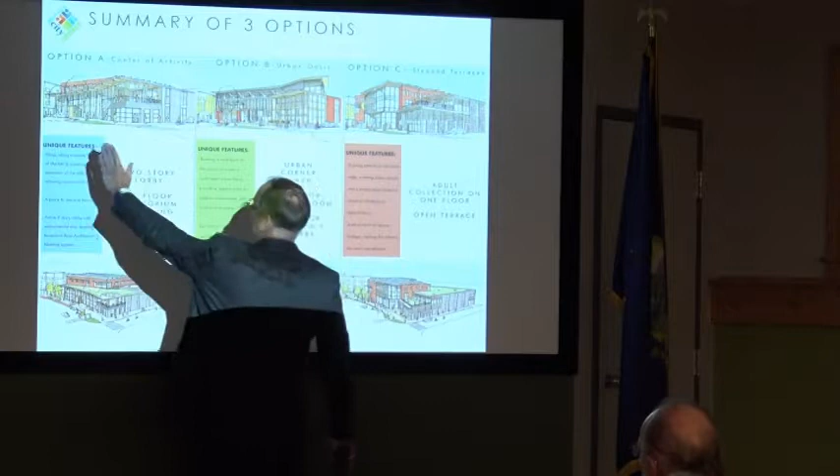But we also had a 2-story lobby that would visually lead you up to that 2nd floor auditorium. We also had meeting rooms up there, and it was a building that kind of followed the street, Market Street, so everybody realizes where the site is, right? Even you folks who did.

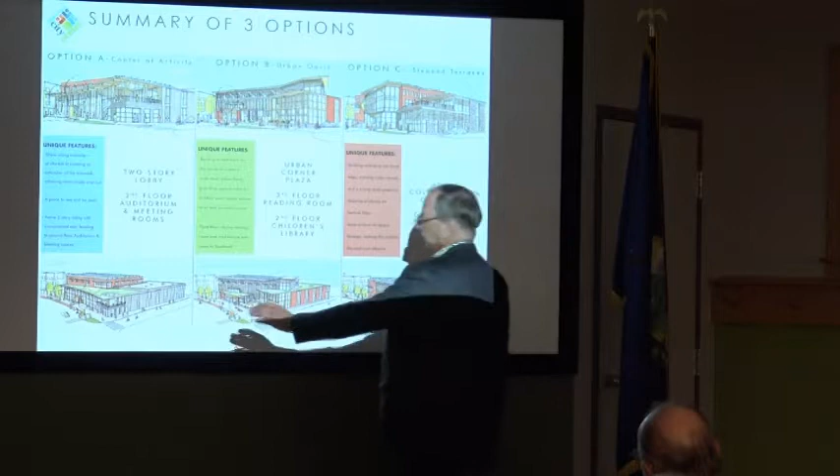Yeah, okay, all right. So Allard Square is the property right here. We're right to the east of it. The new street that we're creating is a relocation of the entry drive to the school. And so we had this outdoor space here in the corner on the 2nd level. And as you can see...

Sustainability is a very important component of our design efforts, so we're looking at solar panels and green roofs and outdoor terraces and things like that. So the Center of Activity, Option A, was a 2-story lobby and 2nd floor meeting rooms.

On Option B, we focused on a corner plaza, because being a civic building, we felt as though maybe there was a great opportunity to create a small space where people could come and get together as a town and celebrate, protest, have face painting, doing all those kinds of things you might do outside.

And then we also created a third floor reading room because we heard from a number of you that typically in a public building, the public doesn't get to go to the top floor. I shared that a library in San Diego, when I was here in January, had the 7th floor of a 7-story building be where the main reading room is, with all these wonderful views. So we thought, let's put the reading room on the very upper floor, best views, most daylight, all that. So that was a big concept there.

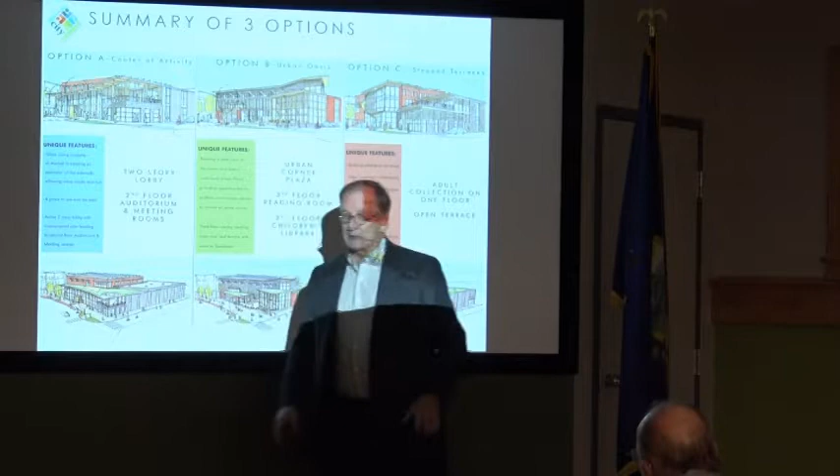Then we moved the children's library to the 2nd floor. I didn't mention it, but in the first scheme, the children's library was on the 1st floor, so you could walk into the library and the children's area was close by, so we're not taking strollers upstairs and things like that. Whereas in the second option, we decided we would try it on the 2nd floor.

Then the third option, we called the stepped terraces, was one where we had the adult fiction and nonfiction all on the same floor, whereas the other two options had the split. So the fiction was downstairs and nonfiction was upstairs. This also allowed us to put children's downstairs. And we had these open terraces that stepped back from the street.

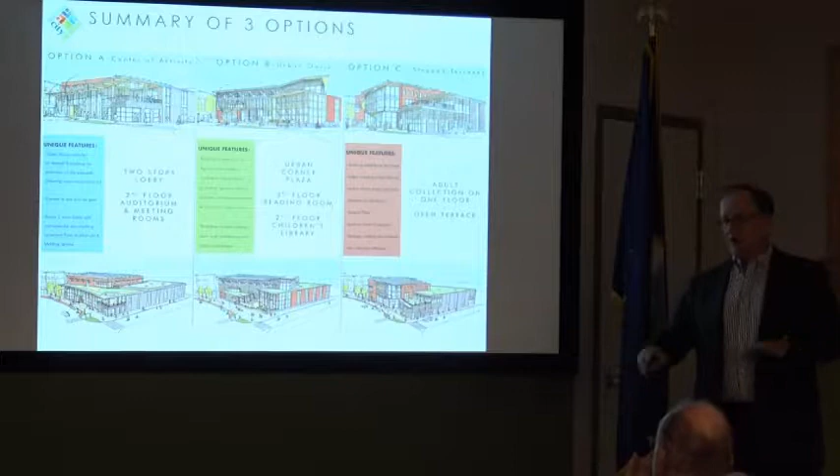I should also mention, we put the auditorium down on the 1st floor here, and we put the auditorium down on the 1st floor there. All of these buildings were 50,000 square feet, plus or minus, so there really wasn't one that was larger or smaller. We accommodated all the functions we've been talking about in all of them. It was just a matter of where we located them on the site and within the building, so we could take advantage of the views and how you came into the building and experienced it, etc. So those are the three options that we presented.

After the meeting, we asked everybody to go back in each one of the corners, and we had a board and an architect there, and we asked people to write down their comments. So the infamous Post-it notes that you all have, we're still seeking information because we've still got a long journey to go before this building will be open, and we want to make sure we're getting everybody's input. Speaking of everybody's input, just in the past couple of days, we've gotten over 450 comments. That's huge, that is really filling our inbox. And we're getting a lot of great ideas happening here.

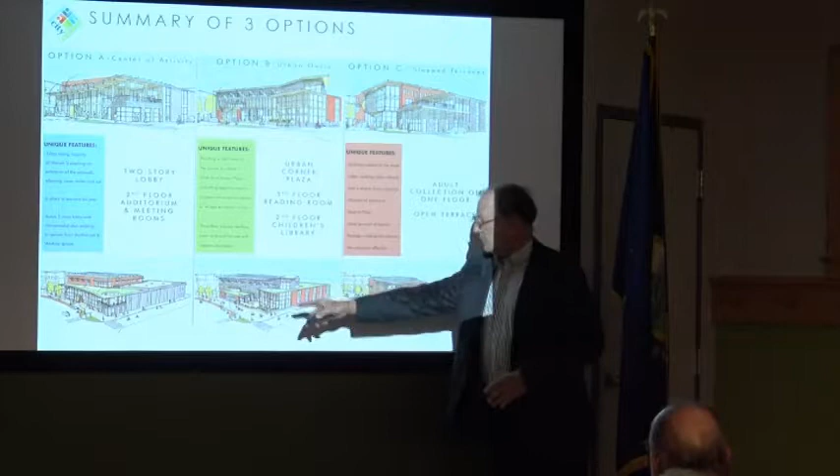So the exterior of option C was a bit boring on the outside. There was a sense that maybe there was more animation needed, more like the other two, but that was just one person. But we heard that from many comments, that option C wasn't necessarily the preferred exterior.

The second floor auditorium wasn't desired, except for those teens. But everybody felt that coming to the lobby of the building and going into the auditorium, which is a multi-purpose room, it'll have tiered seating for about 100. This is where council might meet, this is where meetings like this might occur. Well, everybody felt, most people felt, it should be on the ground floor.

The children's library on the second floor was not something people liked. The fiction and nonfiction split wasn't preferred by those who saw it. And then also the amount of exterior space - it says something about it's snowing outside, isn't it? But it was something to the effect that we're in Vermont, and we can only use an outdoor space like that so many months out of the year. So that's just the highlights of the comments we heard from folks.

Moving on, the exterior of option B was preferred. I think one of the things about the preference of option B is it had a roof on the very top where that reading room was, that some people called it a scoop, but it became very special. The plan of option C was the most efficient use of space, most bang for the buck. And when we talk about the most bang for the buck, we're not just talking about opening day, we're talking about the longevity, the operating of the building. So we're looking at it from a library operating standpoint.

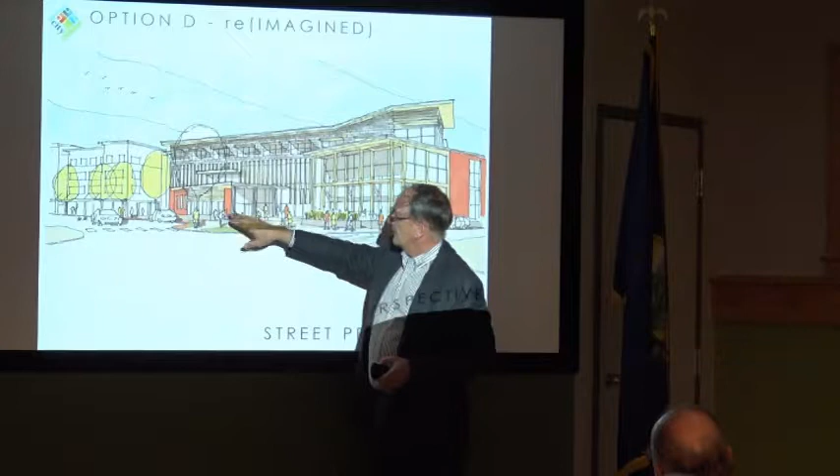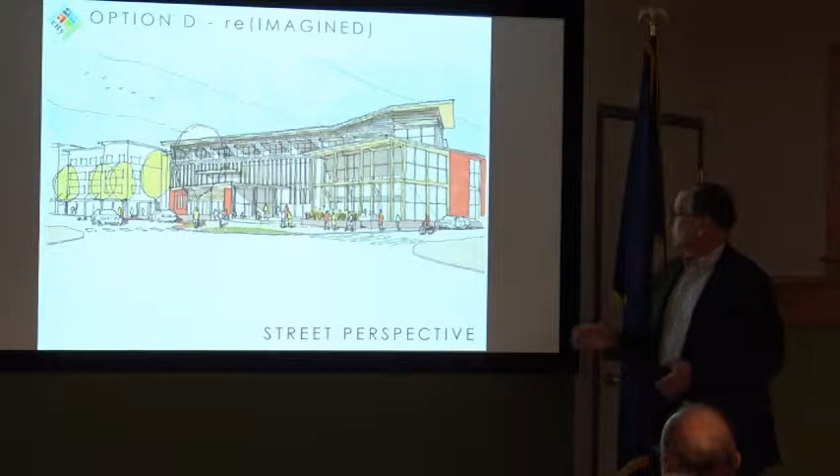We have some special places happening up on this level. We have a meeting room that's going to occur in this area here. And we have a wall that starts to kind of define the street, the curvature of Market Street. We have a very animated pedestrian experience, which is what we want to create along Market Street, because it wants to be a very downtown, urban, pedestrian street. And then this is the street going back to the school, and we have lots of glass. We aren't showing the street trees and things like that here, but just to give you an idea of the architecture - we have a two-story base, and then we have the celebrated third floor.

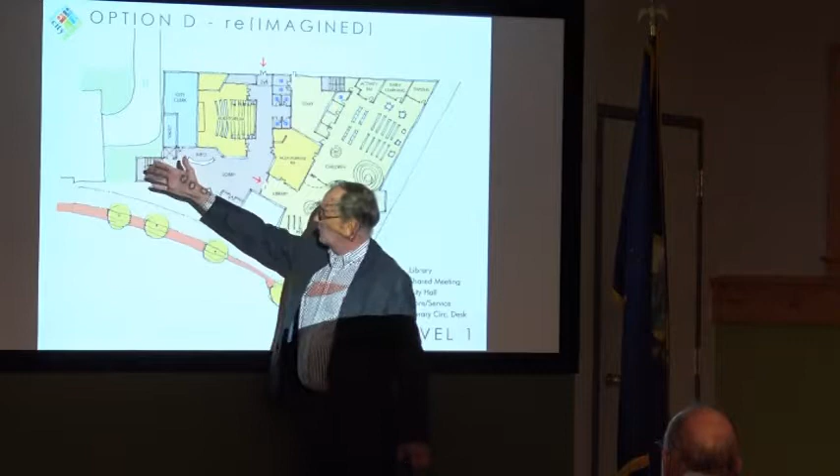So what we heard is that the lobby should be something to be celebrated, but not overly grand. So we only have a very small portion of it that might be two stories. But we come into the lobby, and we have the information desk that's right adjacent to the city clerk's office, so they're somewhat shared. That can be a one-stop shop. We have a stairway here that pokes out, so it can be all glass and open and very inviting.

We have down here an area that we can have seating, where people can have coffee, have their lunch, just sit there and celebrate along the street. So we have this lobby area that's appropriately scaled to allow for people to come into the information desk, or we can come this way to the library.

We also heard from a number of people that we have been providing an entry off the north from the parking lot to the school. And there's a sense that we had it maybe too narrow and it wasn't as inviting, that there may be folks coming in that direction. So we widened that up a bit and made it a bit more celebrated, but this is still the front door. We pushed the auditorium over slightly, but this is still the same auditorium configuration.

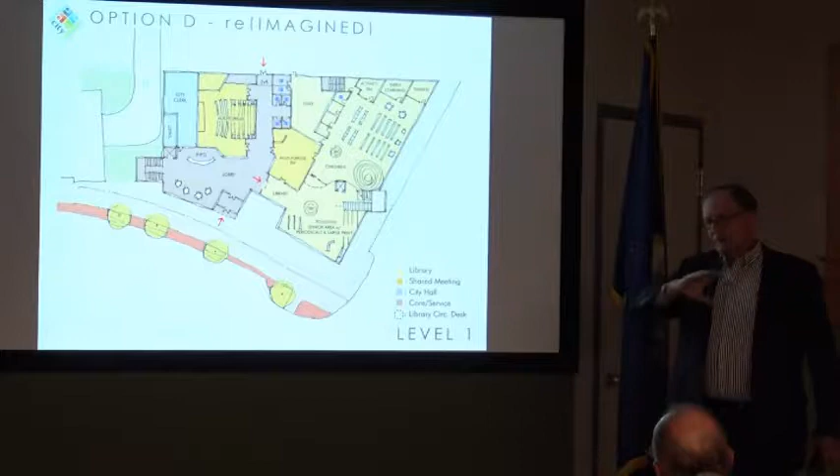We have storage rooms, and we have the ability that we can come in and unload musical instruments or equipment that's used in the presentation that can come from that side. We also have restrooms located back here that we're looking at having - I'll call them single stall restrooms that are private, as opposed to the traditional larger restrooms. And that's all off the hallway here, so that people going to this auditorium for events are a little bit separated from those taxpayers over there.

But we also have this multi-purpose room that can accommodate between 30 and 50 people. We've made it bigger - we heard that there was a need for making those spaces bigger, so we enlarged this room. We have a kitchen back here. And this room can be accessed off the lobby, or it can also be accessed from the library, so it can be used by both. Yes, sir?

Do you prefer to take questions on a slide like this while you go along, or wait till the very end? The question was, would you prefer to wait or ask questions now? I think what I'd like to do is go through this slide and then you ask questions, as opposed to just interrupting, if that's okay.

We created the multi-purpose room as kind of the hub of all these functions down here. The shared spaces are in the darker yellow, the city spaces are in the blue. The common public spaces, like the lobbies, hallways, and restrooms, are in this grayish color, and the library is the lighter yellow.

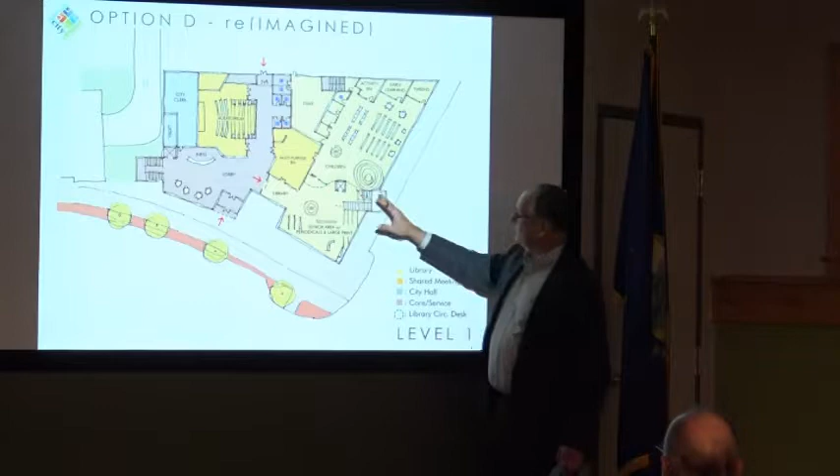Then we have a stair that goes up to the second floor, or an elevator. Going into the children's area, we have a defined children's area with a wall going like this. We're exploring a way to bring the bookmobile into the library so it's a feature used as you enter the children's library—it might be a part of it somewhere in here.

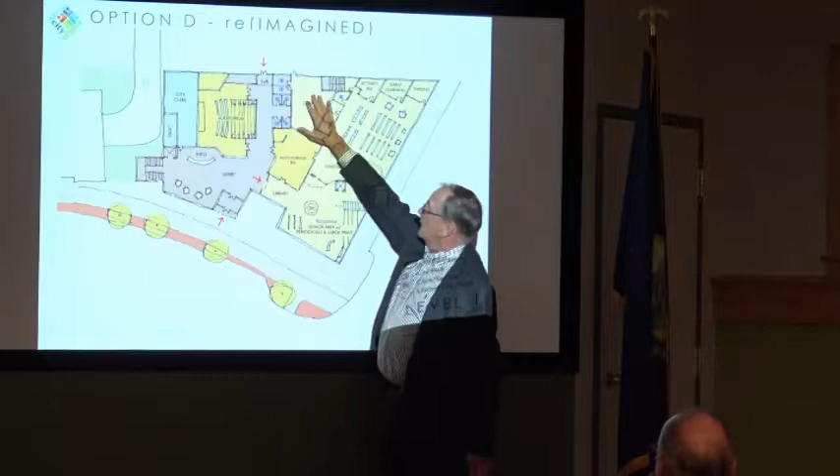We have the children's service desk here, in line of sight with the main service desk, so staff can come out and help if needed. Then we have the children's area with a tween room, activity rooms, and things like that back here. We have a children's family restroom, some offices, and staff processing books back in this area.

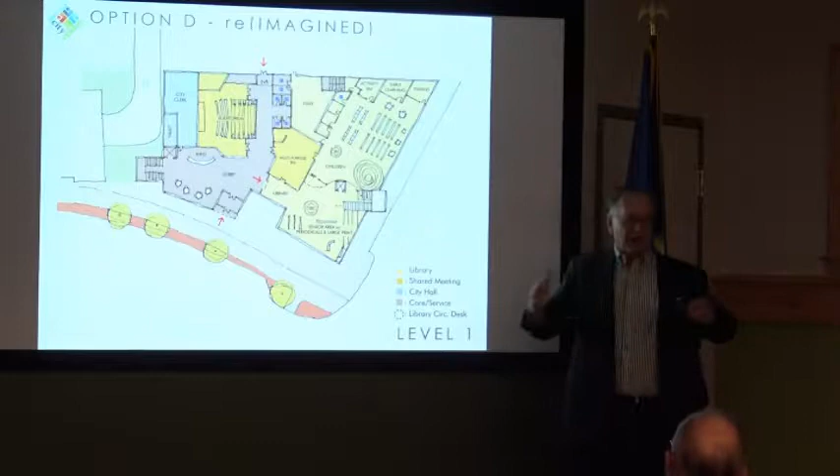And then we have the juvenile fiction and nonfiction, picture books, easy readers, and seating along the windows. We have a story time area right here—we're not going to have a room for that, but an area that may have a special ceiling, a special floor, etc., so children can easily come in. We can park strollers along here.

So the children's area works very nicely and is contained acoustically. It can also gain access to the multi-purpose room if there were a program that wanted to take place there. We've created this really special area as you enter. There's been some discussion about the Friends of the Library book sale kiosk taking place there, yes and no, so we're exploring how that might work.

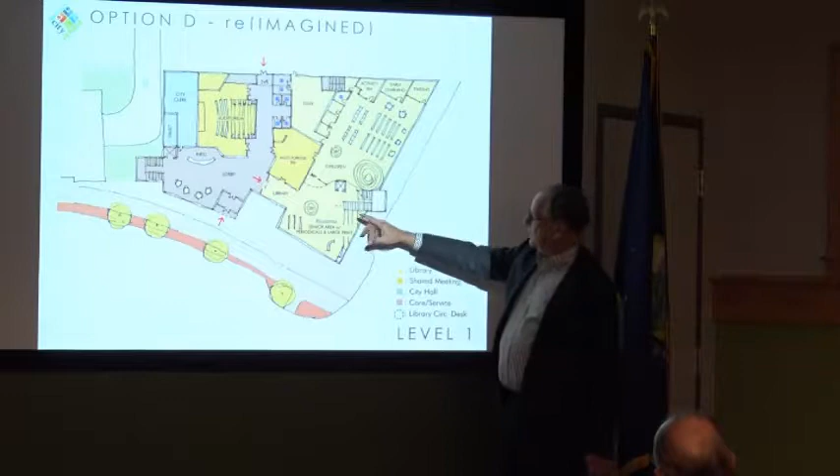But all of this area will be a really wonderful place to come in, very inviting, and then you would come up to the second floor. There's actually a space where we could have some seating on this landing between the two floors, and then the adult collection is upstairs. So I'll ask if there are any questions about what I just shared.

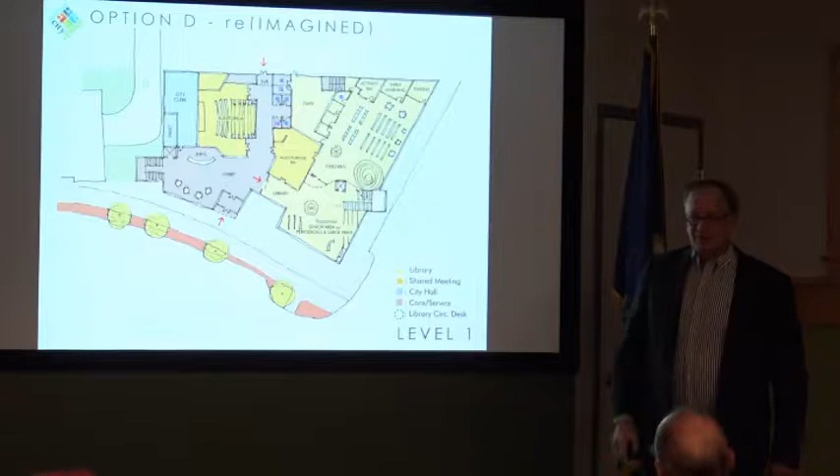Yes, sir. In an earlier version on the first floor, there was quite a bit of interest in a cafe kind of thing where people could eat food and either eat there or move outside during those months when you can. Has that disappeared? No, we still have the opportunity to have some of that happening here, and we're still wanting to look at having either a garage door or some kind of ability to come in and out, and to do something in here. So the question was, are we still looking at the cafe?

The second question was about whether the separation between the senior area and the children's area is sufficient, so that seniors who prefer less noise are balanced against parents who want access to the kids on the first floor. I think there is sufficient spacing between here and here.

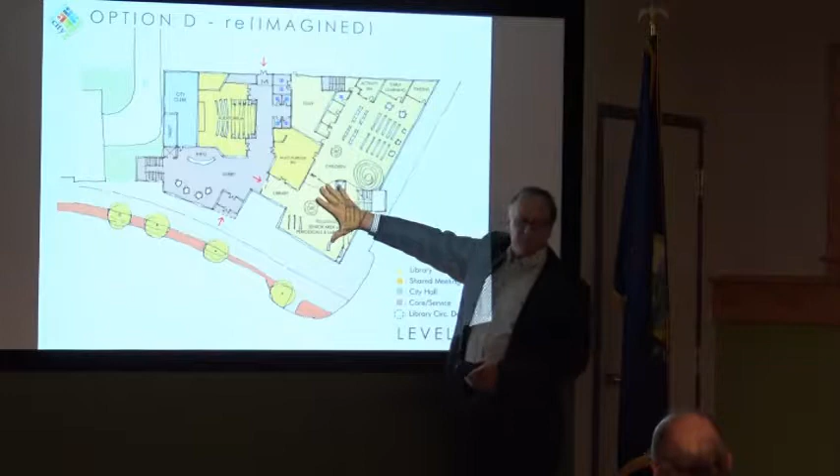It doesn't look like it, but this is a fairly large building. I'm going to guess, Tim or Michael, this is what, 50 feet or so? About 50, 55 feet, so it's like from here to that corner.

But there is a barrier for the sound, a barrier right here. So the question was about whether there's a separation from the children's area to the senior area. I'm going to ask this gentleman next.

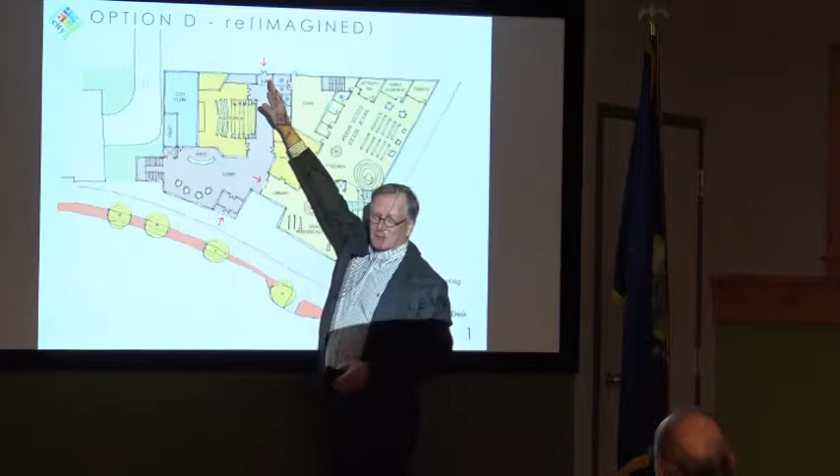I had three questions. The access at the rear of the building, will that enable kids from the school to come directly into the library? They wouldn't come directly into the library, but they could come into the building, and then access the library that way.

The second question was, how much smaller is the plaza than it was in the former option B? It's actually, there's a way to look at it where it's bigger, because we lowered the building to street level. In the original scheme we were up about 30 inches, so there was a separation between the streetscape and the actual hard plaza itself.

We've moved the ramp and lowered the building, so it's a continuous space from the curb and the tree belt right up to the front door. And the third question—go ahead.

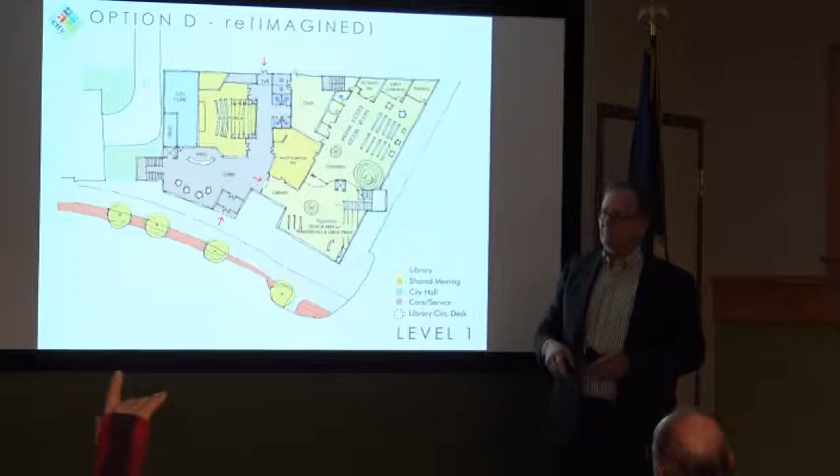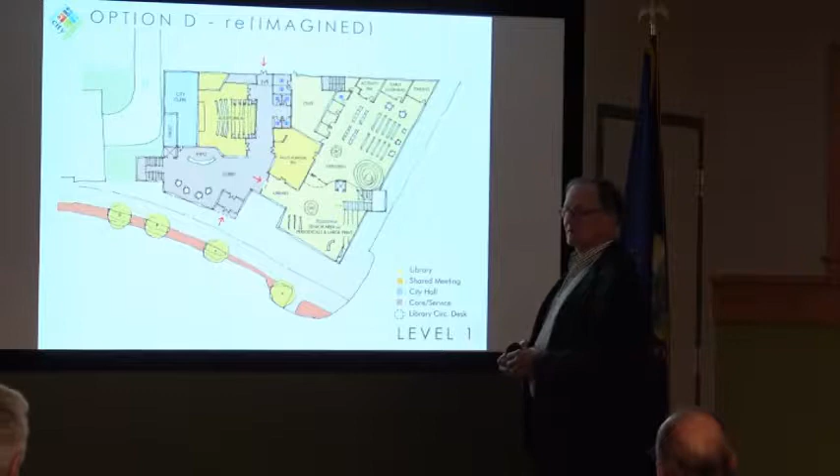Which is the most important one for me: is it possible to remove some of those sharp corners, two of them, which define the plaza? These corners here? That one, no, the one where your finger is, and then that one, yes.

Yes, we can do a lot of things. So the question was, can we soften those corners up? And yes, we're not quite into the architecture yet, so this is still a piece in evolution.

Did you want to say something? We are still exploring options for shifting the building a little bit in order to obtain additional plaza space. So we are looking at additional plaza.

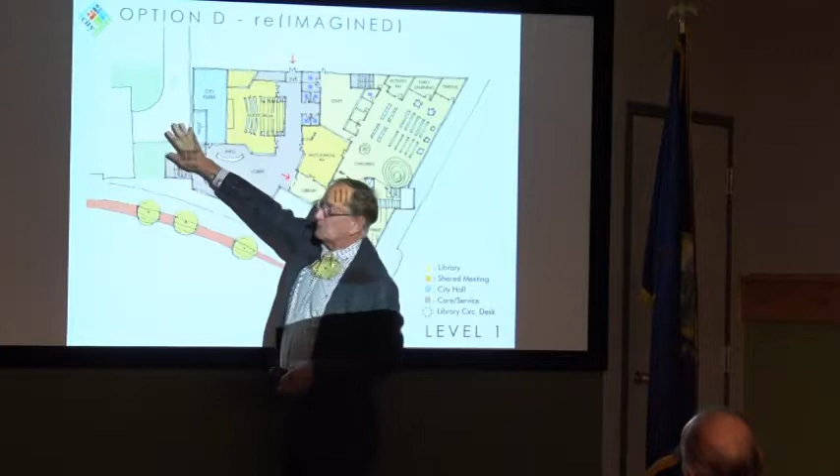I failed to mention that in the other option, the ramp was coming underneath the building, and we've now moved it over. When it came under the building, we had to raise it up about 30 inches or something like that.

So now the building is down at grade, so we don't have stairs and ramps and things like that. It's completely accessible, et cetera.

I'm losing track, but I'm going to go row by row. I just was curious, if the Friends have their kiosk, what about storage for their continuing change of inventory? Yeah, we have some space for that, and that's something we have to work on a little bit more.

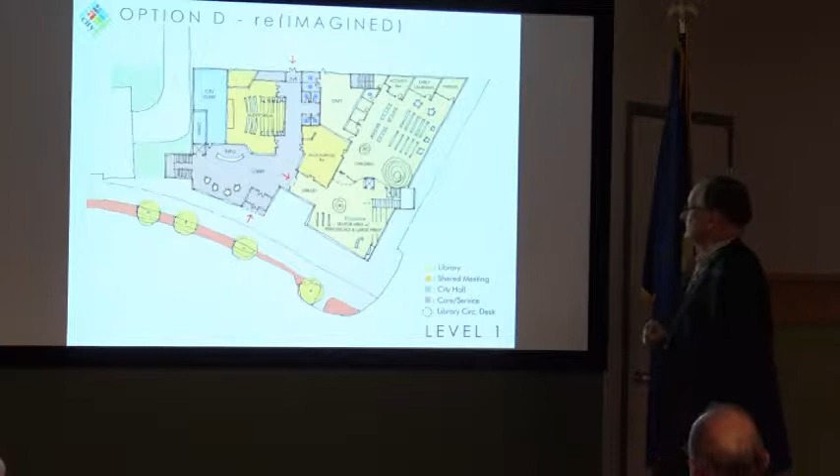Keep writing those comments down so you remind us, and I'm going to come across the second row here. I'm wondering about the small spaces next to the staff space—there's a bathroom, and then the other 3 rooms are for staff?

One is the children's librarian—the children's manager or children's librarian—and another is like a study room. We haven't defined every space yet.

My other question was about the expansion of the multi-purpose room, since there wasn't anything that large on any other plans—was other program space taken away from some of the other floors in order to make that happen? The question was, in order to make this room bigger, what did we give up?

Well, we were a little more creative, and we were a little oversized in a couple of things happening on the other side than what the program called for. So it was just going through and refining, knowing we had to find more space for that room and make it a higher priority. So we found the space.

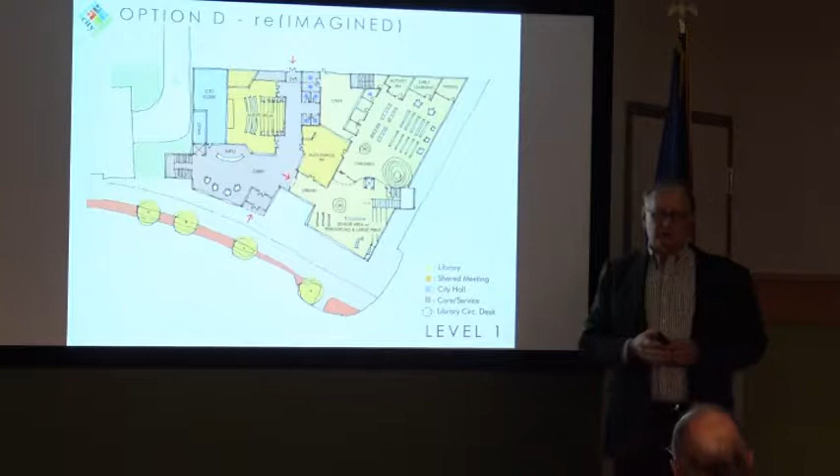But it didn't take away from other meeting rooms kinds of things? No, it took away from the lobby space, basically, more or less. Okay.

On the staircase where you say there is a landing—it might just be the way it's visualized there—but does it literally jut out from the building? Yes. Okay, cool.

Yeah, so it's that kind of overlook that you can be out, cantilevered out over the sidewalk, looking down the street. Wouldn't that be very cool? It will be, yeah.

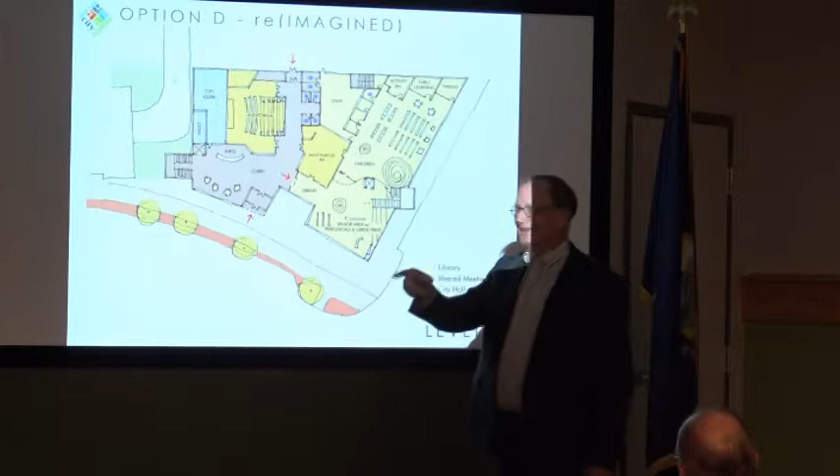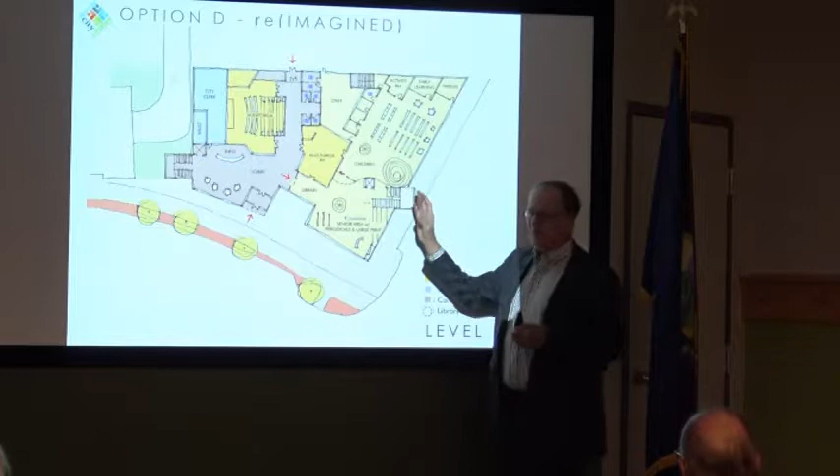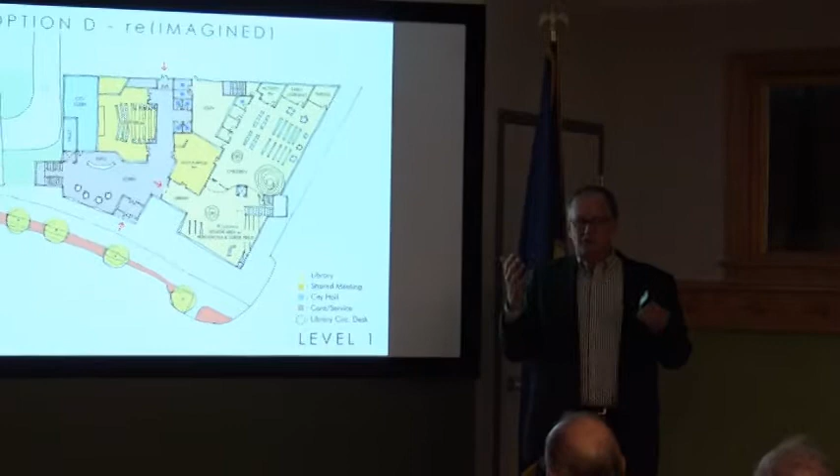Will there be natural light in the stairwell? Absolutely, yeah, this would be as glass as we could possibly make it, within reason. Lots of daylight coming down in the stair. We're trying to make that, going up to the second level, a very inviting and welcoming experience, as well as this stair over here. We heard some concerns that our stairs for the city hall were fire stairs, and they didn't look like they would encourage people to go up, other than the one monumental stair we had. So we're trying to express these so that people can look out, bring daylight in.

They're inviting spaces. Is there an elevator too? There is an elevator for the library, right there, and an elevator for the city hall.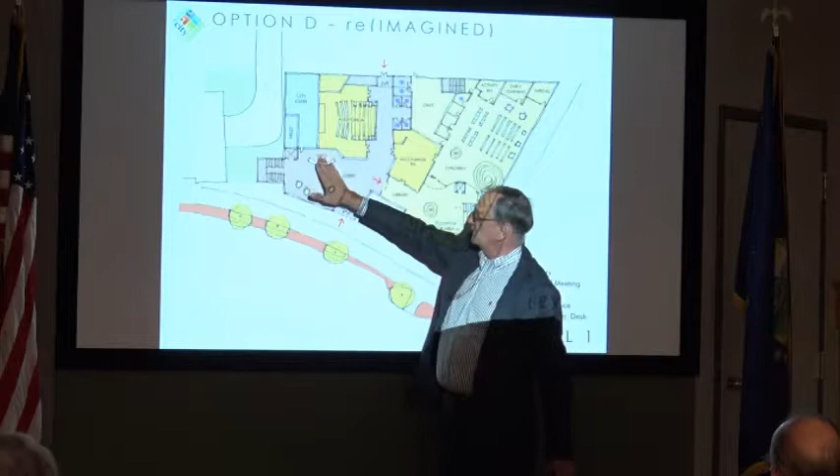So we come into the information desk, and if somebody says the city manager will meet you at 1 o'clock for your appointment, you need to go to the 3rd floor, you take the elevator or you take the stair, right there.

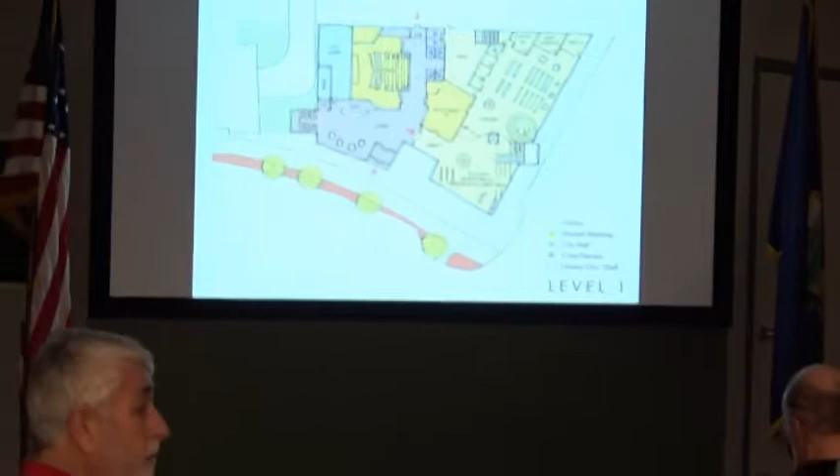What's the topography of the auditorium? It is a flat floor, and we're using a series of seating that folds down, sort of like gymnasium type seating, only it has theater type seats in it.

It's the same exact design that was used at Studio One at Vermont Public Radio. It's really a neat thing, because it folds back up, and we can do all kinds of yoga or other activities in here as a flat floor, or it can fold down and we can have a great concert, like we had in here on Sunday, only it will be in a much more acoustically appropriate setting.

Is the seating raked? Yes, raked. So it's not going flat like this, but it's angled like that.

I was just wondering about the tween space there in the back corner. Can you give me an idea of the dimensions or square footage? It's hard for me to conceptualize it. Yeah, so this is about 20 by 20, so it's about 400 square feet. A standard school classroom is about 900 square feet, so it's about half that.

We're actually thinking about not calling it tweens, but calling it middle school or something. We're working with them on what they want. They wanted an urban oasis - that's what they wanted it to be. So we want to do something for them.

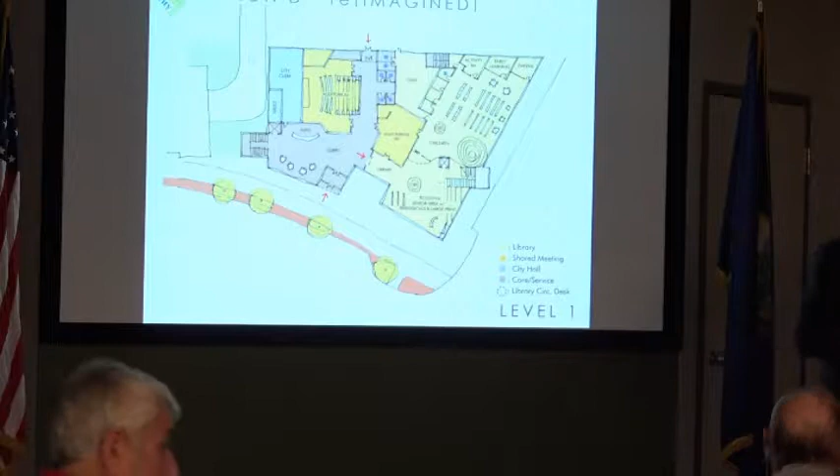Can the new larger meeting room - the multi-purpose room - be subdivided in case two groups want to meet at the same time? Yes, it could be subdivided, so you have more flexibility.

I'm going to go back over here. I'll come to you, yes sir. Ma'am, I'm sorry. A couple of questions.

One, the plaza - is that the part just near the entrance? Well, it's really about our build-to line, which is really out here.

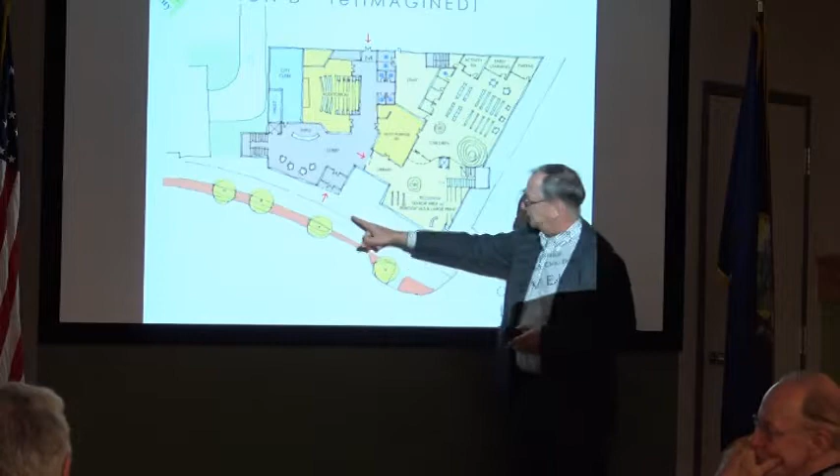So will there be, like, if the children want to go outside and do an outdoor activity, a reading or something like that, can they do that in that little area there? Sure, why not? If it's programmed, there could be all kinds of wonderful things that children could do with their children's librarians.

They're very creative. And a couple other things - there's tweens, or the Oasis, or whatever the kids - well, they'll have to go through the kids' area to get to their space.

Whether to flip it, we've talked about that, and we're working on it, because some of the tweens we've met with are reading material from the second floor, not from the children's area, and yet they don't feel necessarily comfortable being with the teens. So we're working on those relationships.

Or just flipping it, having them closer to the stairs so they could scoot back, or that back stairway - flipping the tweens and that activity area. Sure, that's a great idea, that way they... Make sure you write that down. My memory bank will go, but that's a great idea.

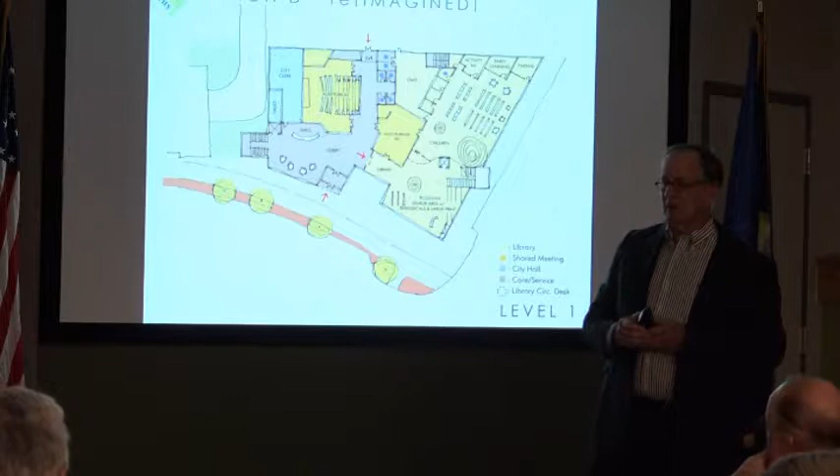This isn't directly about the library, but something said made me realize I may have missed it in earlier meetings - none of this space is going to double as a senior center, correct? That is my understanding. We're not replicating that.

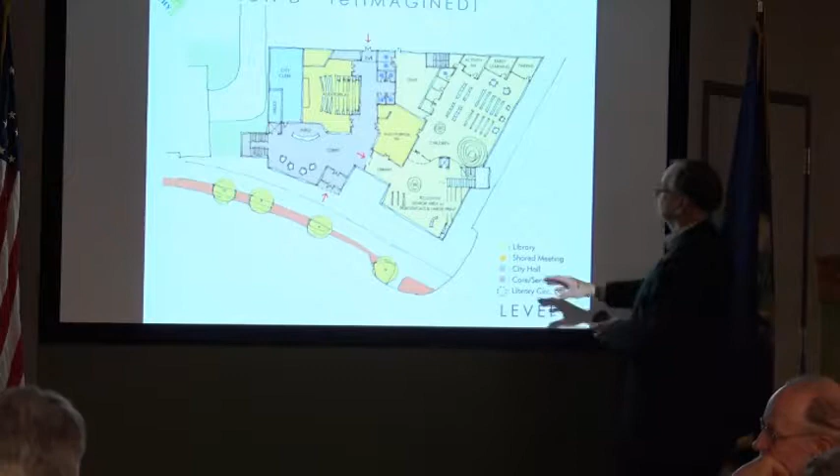It's not specific, but it will have a lot of senior-specific spaces - spaces with seating appropriate to seniors, spaces where you can play card games or board games, and there might be age-specific computer monitors and programs.

I just wondered what has happened to the idea of a new senior center. Right, and so this will have - we've also talked about a coffee station inside the senior area.

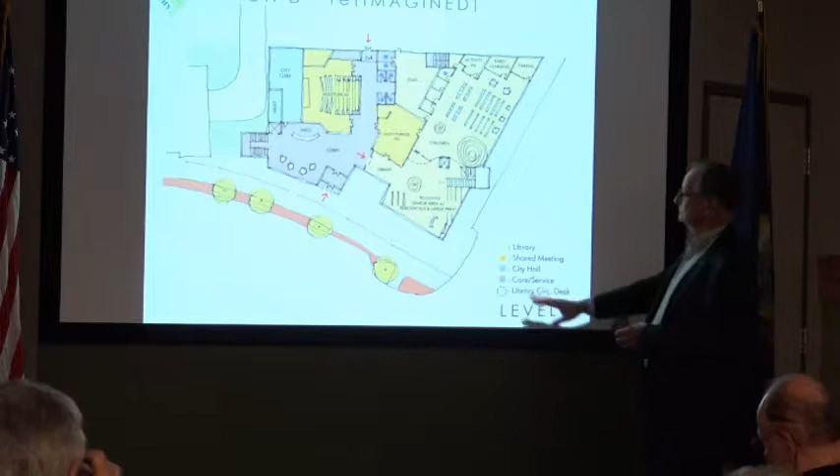So a coffee station, working to make this area in the front of the building, right near the main door, on the ground floor, as welcoming and as conducive to not just reading, but more social activity as well. But we don't have a senior center in our plan. Correct, not a specific one.

We've also talked to Recreation about whether the lunches might be here, since there's a kitchenette and a multi-purpose room, as well as other wellness activities good for either hard or soft floors - not necessarily something like jazzercise, which might be really loud, but more mindfulness type activities.

All right, other questions? We'll come back to the front. Rick, go ahead. I know that in the overall city center there's a lot of interest, and people think it's pretty important that we have a place for farmers markets or similar activities. The question is, is it big enough to accomplish that, or if not here, where?

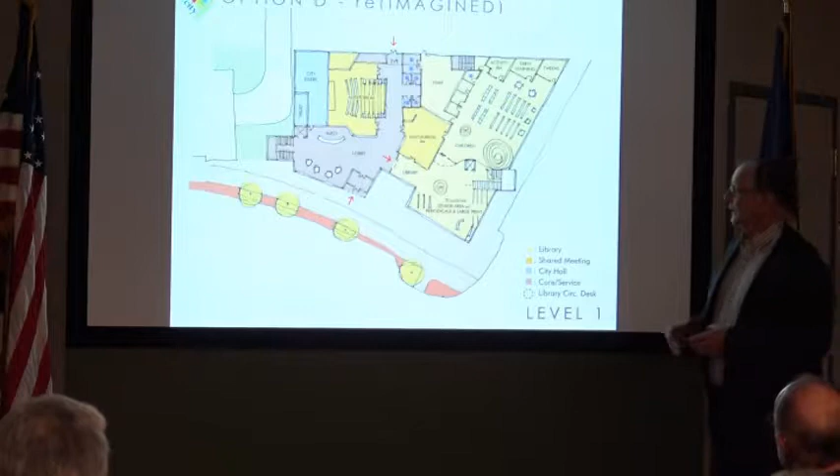Moving outside the building, Allard Square just to the left - I assume that's a drive to get into their underground parking. That is correct. And is that roughly the scale, so the buildings are really going to be that far apart? Right now we've got 45 feet between here and here.

And that is the access to some of the parking for Allard Square. Right now on their drawings it shows it kind of coming out here, so we're going to take it to the north, and it makes our building more cost-effective.

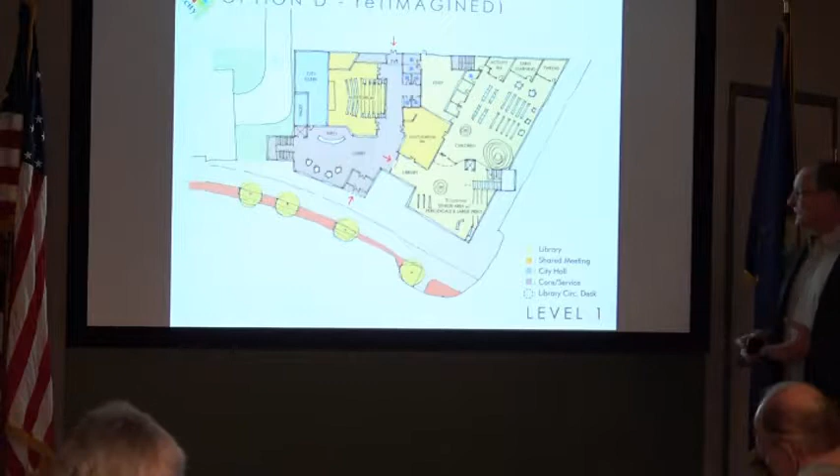All right, any other questions on this floor? Let's move on. Okay, so we're going up to the second floor - we're on this really wonderful daylit stairway with some seating up there, or we're taking the elevator.

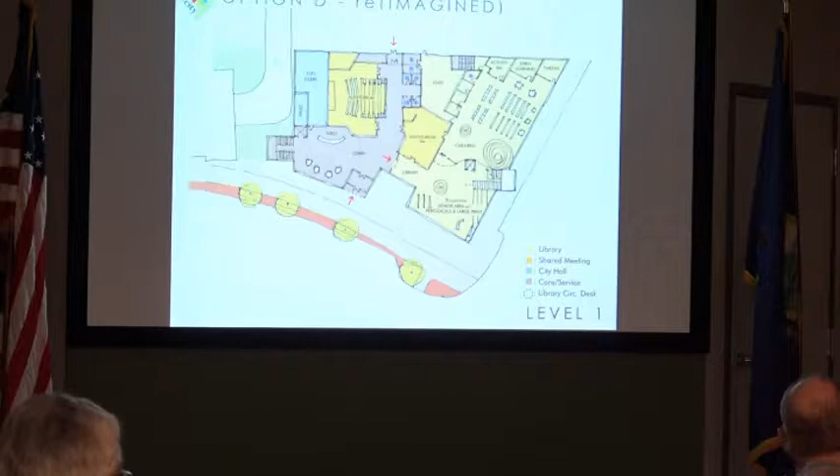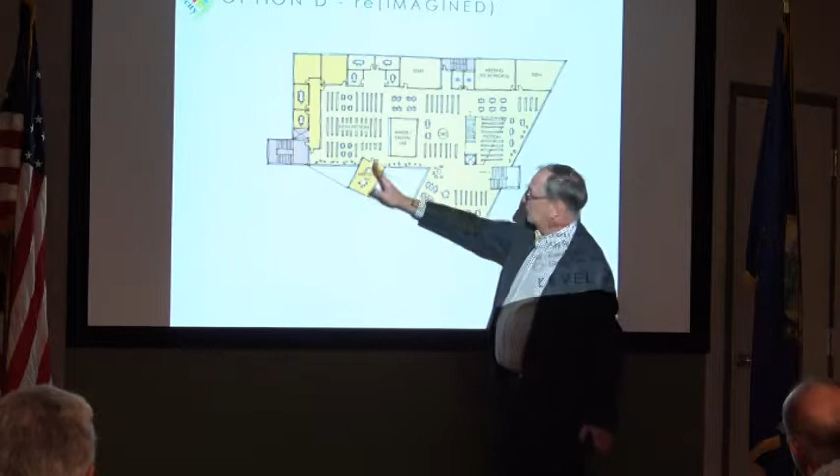So we have more stacks placed back here. We have a meeting room sitting on top of the entry vestibule, kind of a jewel box that's able to look down on 3 sides, juxtaposed, jutting into the space, which creates a really nice dynamic. This will be a very special room for groups to meet.

Along the back side of the building, the north side, we'll have plenty of windows because we've got lots of great north light coming in. We'll have a teen area up here in the corner, a meeting room for 20 to 30 people, and restrooms for the library users.

We have the stair from the first floor here, a staff area, smaller study rooms located around here, and individual study carrels out here. So we've got a variety of seating types and a variety of activity spaces.

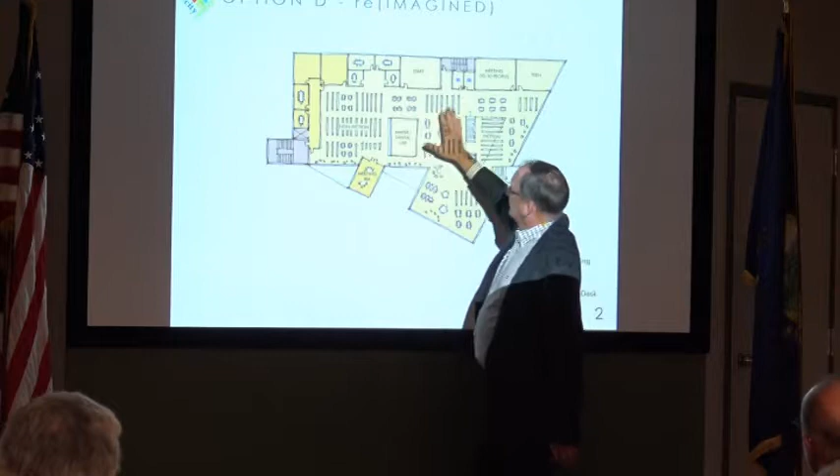Alana mentioned board games, puzzles, and things like that are very popular in libraries and areas like this. So we've got all of this area for fiction, nonfiction, and the teen area back here. The young adult collection is right here, so they have their own space with lounge seating and a gaming area.

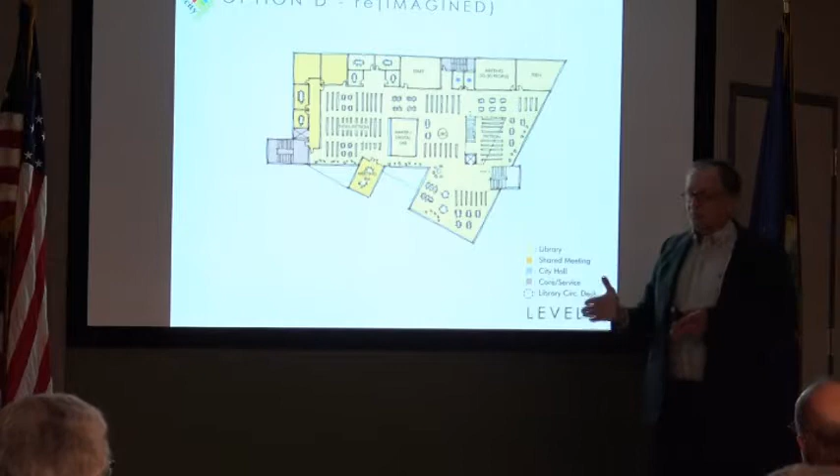They could do craft making and collaborative projects. A lot of teenagers now do most of their schoolwork in groups of 2, 3, or 4, so we would have special areas for that.

This meeting room would be very flexible. We have similar size rooms down here, the darker yellow ones, that are totally shared, accessed from the city's stair from the lobby or the elevator. We also have a corridor up with 6 or 8 person meeting rooms, or larger ones, which are available for use by the library.

We're trying to get as many meeting rooms as possible. In our experience with libraries today, that's a very popular and needed demand - the ability for community members to come in and meet, or for people collaborating on a project to come use these spaces. So the center of the floor is open, and the perimeter is where a lot of the meeting spaces are.

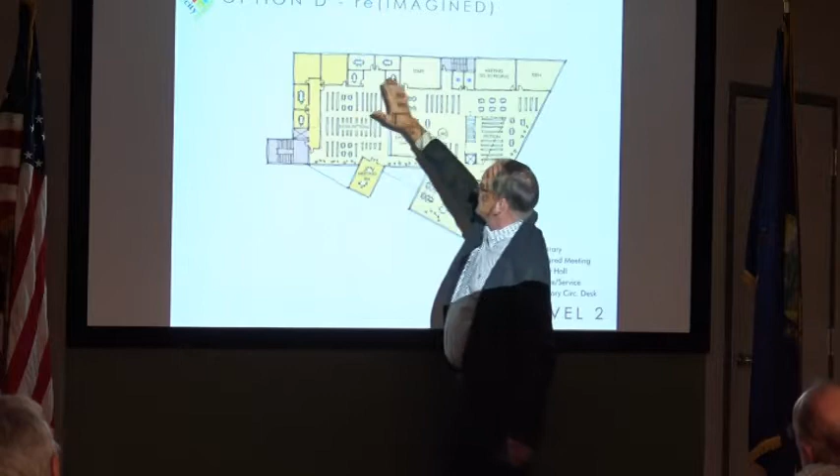And again, there'll be glass here, so that we can see in and get the daylight coming through from the north wall.

Yeah, the darker yellow rooms on the side - is that shared with City Hall? Shared with City Hall, and they would be programmed so that they could be reserved on a basis where if you wanted to reserve that room and it was open, it could happen. That's kind of how we see that happening in other libraries we work in that are in shared environments like that, and we're trying to make sure those spaces are used every hour the facility is open.

That's really the opportunity here - we don't want them to sit there dark or empty. Yes, I'll come back to you.

City Hall, I think, opens at 8. And say there was a meeting that started at 8 up in one of these rooms - I'm concerned about restrooms.

The library may be open at 8, but it hasn't traditionally been open at 8 that I know of. The code only requires restrooms on one floor adjacent, so we have restrooms upstairs in the other City Hall, or downstairs. That's not the most convenient, but for those times when the two aren't open, that's one way we could address it. They'd either have to go upstairs or downstairs if the library is not open.

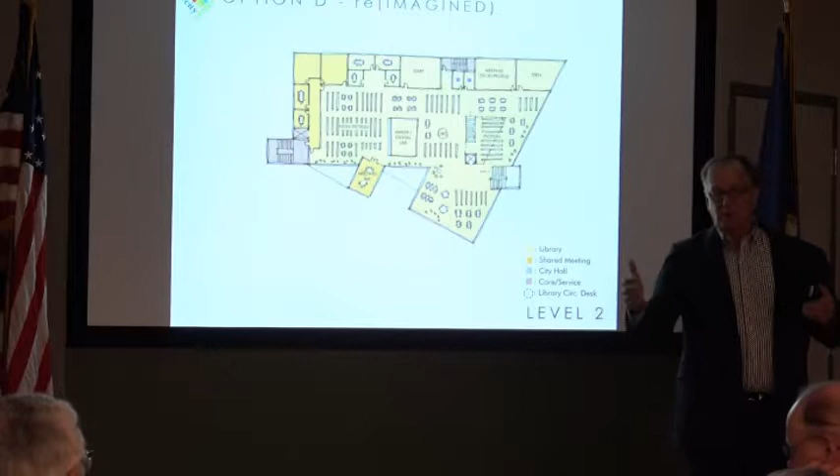Can you speak a little bit about the digital and maker lab? More to the point of what goes on there and how much is that room used, and if it isn't used 100% of the time, is that the right location for it? So the question is whether that's the right location for the makerspace, digital lab, and will it be used all the time. A lot of it has to come back to programming and staff, whether there's staff really trained and wanting to do that type of activity. Now, makerspace doesn't always mean digital either. Makerspace can be a sewing group getting together, or something that could even be messy using more artistic type materials. So it's a very wide variety of activities.

What we've seen in libraries today is that it's extraordinarily popular, and putting it right there will encourage people to come to it, as opposed to putting it off in the corner where no one sees it. When you're exposed to something, you tend to get interested in it. So this is very common in libraries today, being at the heart of it. Just as an example, tonight there's a program at the library on taking photos with your iPhone, and it sounded like it was very popular. So a lot of these things may not be popular today because there's no programs, but I'll guarantee you that once we start getting something to happen there, it'll really be the spark of everything.

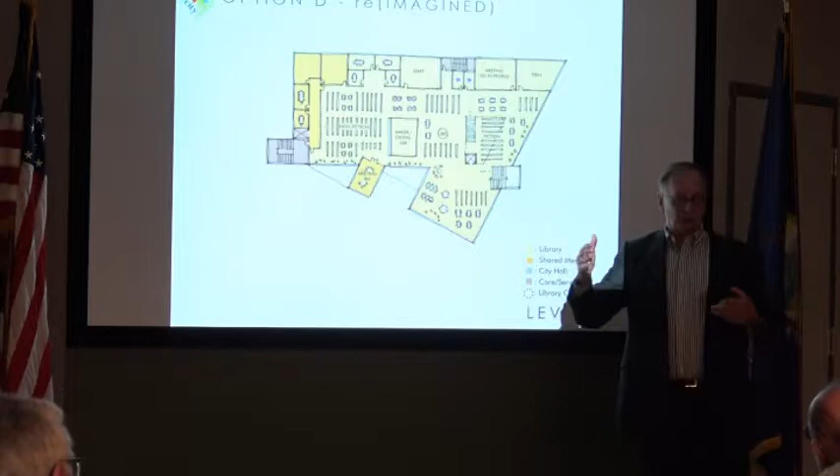In Madison, Wisconsin, they call it the bubbler. It's right on the sidewalk, right there, and people come into it all the time. So it's just a matter of how it's programmed, and if it weren't programmed, then we can make it a meeting room. It's intended to be a flexible space, so we wouldn't want it empty and dark with things sitting there not being used. But I'll bet you through a very thoughtful programming process that space will become very, very popular.

Quick comment on that subject: there is a space very similar in size to that at St. Michael's College right now that has, I think, 6 or 7 3D printers, a laser cutter, and 2 sewing machines, to give you an idea of the variety that takes place there. Yeah, digital sewing machines are fabulous, and 3D printers, CNC routers - some of these maker spaces look like a wood shop when I was going to school, only today it's all technology, or some of it's craft. So it's really, really popular, but 6 3D printers, that's pretty spectacular. It's a college, nonetheless, yes.

Two things, maybe the first one's a question for Jennifer. So the library is now on 2 floors instead of 1, and has 3 circulation desks, 2 on the ground floor and 1 on the second floor. It would almost seem as though we need to expand the size of the library staff because of that. Being on 2 floors automatically does that, yes, and we've built in some staff into our human resources plan.

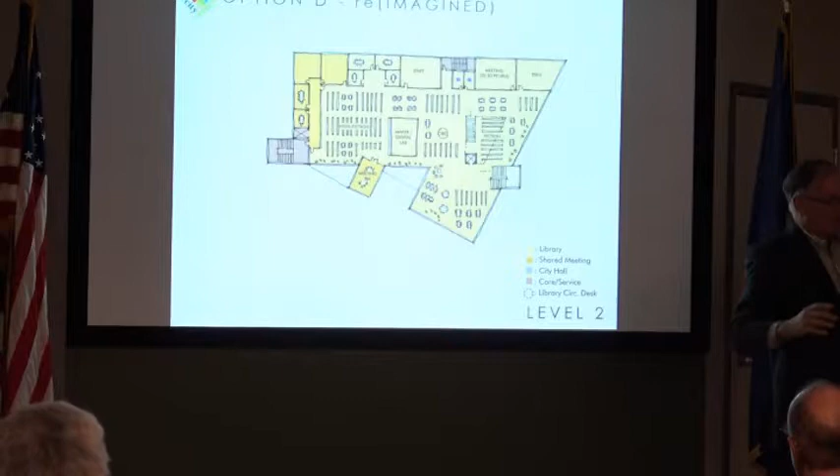Two questions. Is there a sight line for staff into the teen room? It looks from here like it's obstructed by these bookcases. The stair is open, so there is not as good a sight line as we'd like, but that's exactly why that desk might be moving—because the teens aren't there until 3:30 on a weekday during the school year, so we wouldn't want that desk sitting out in front of there. We'd have it where the adults or normal customers would be coming, and if it were teen heavy, then we could move it back there, as Jennifer mentioned.

Second question: if these are shared meeting rooms on this floor, and they're accessible at times the library is not open, I have a concern about security of the collection up there if there's no library staff present. There is a hallway right here—and that locks, yes. So the meeting rooms would not be accessible into the library if the library were not open. The one that juts out in front isn't—this one is accessible. Different story—that one is more focused on library hours.

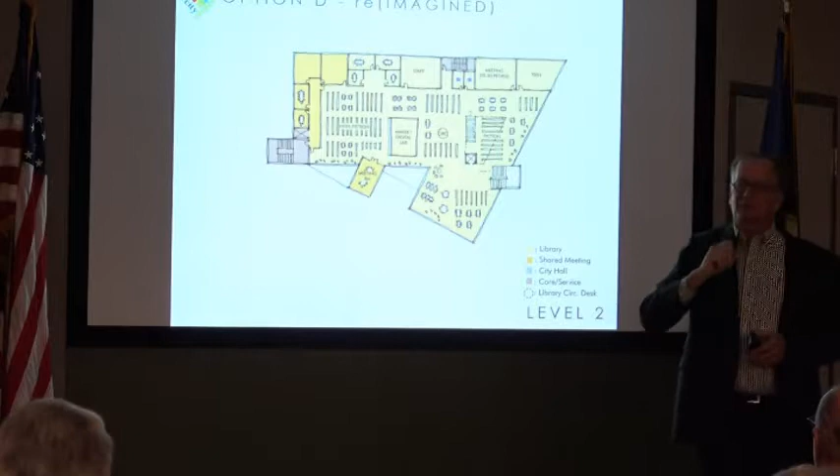I'll go back there and come to you in a second. Yes, ma'am—would there be a sink or cleanup area in the maker digital space? Absolutely. We had a lot of questions on Saturday, but yes, we will have those types of facilities in there to support all types of tasks.

My question is for Jennifer. Do you anticipate that the Friends of the Library will be moved in with the bookshop, or are they going to stay at Wheeler? Oh, the Friends of the Library and I have been talking the whole time I've been here that they would move here. So where would that be—downstairs? They were on the first floor, and that's a level of detail that just didn't get drawn in. Okay, all right—there are two models that we're considering.

One option is having the Friends out in the open living room space, where maybe some of those stacks would be their book sale. The other model, which we don't have a picture of, is that maybe they would have an actual shop that might open into the library or into the lobby, so they could open it even when the library was closed, like when there's something happening in the auditorium. So those are the two places we're looking at.

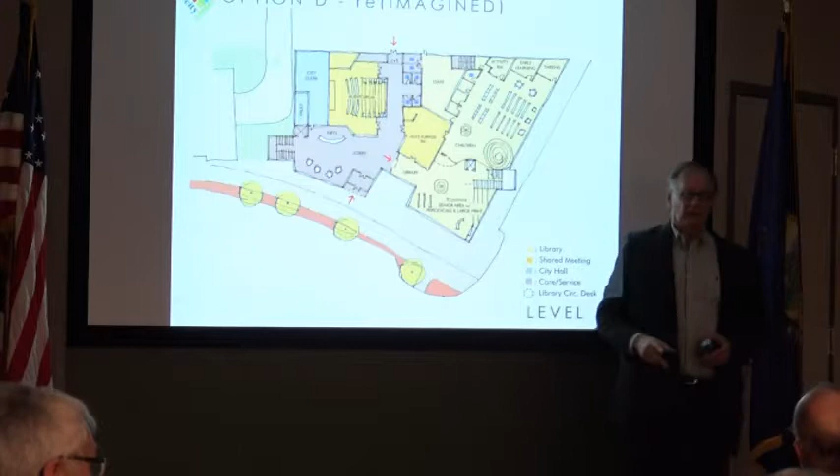Just curious. There are some great examples of how they might fit right in there, and if they're not there, we can close it up.

Any other questions about this floor? Yes sir. The stairwells - the one on the right shows they're open to the floors. The one on the left, is it more closed off? Do they have to have doors? Do you have to open a door to go into the stairwell?

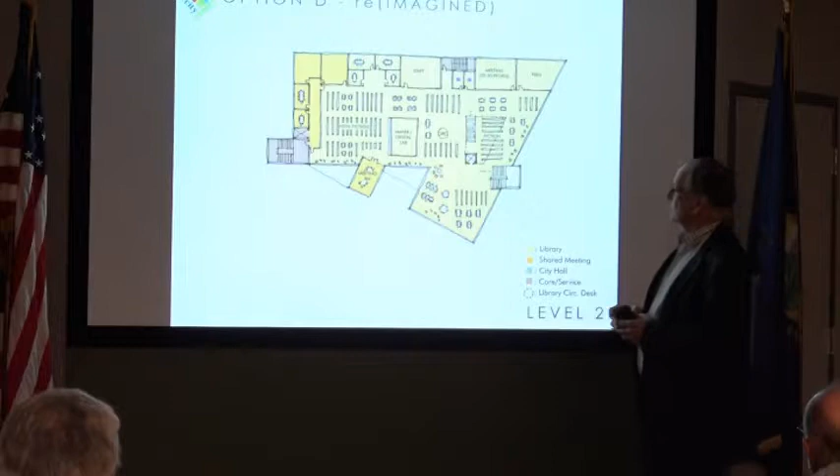So this stair would be open - we can do one open stair. This other stair would be more like a fire stair, only it would be in glass on these sides.

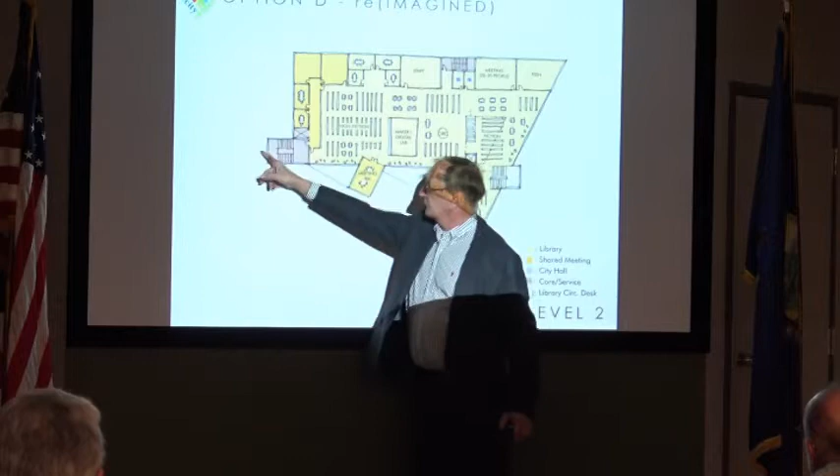Are there codes about how those stairs can be configured, or the shape of the block that's going to hold the stairs? Can it be rounded? Yes, it can pretty much take any shape. It just has certain widths we have to maintain, handrails and things of that sort. So it could be rounded, except we couldn't do a spiral stair because the tread gets too small.

We have to have treads of a certain dimension, so the treads have to be a standard size - 11 inches. So you can't have a spiral stair with varying treads? No, helical stairs - you could do a curved stair like this, but we have to maintain a certain dimension for safety purposes. But there's a lot we could make much more imaginative if you wanted.

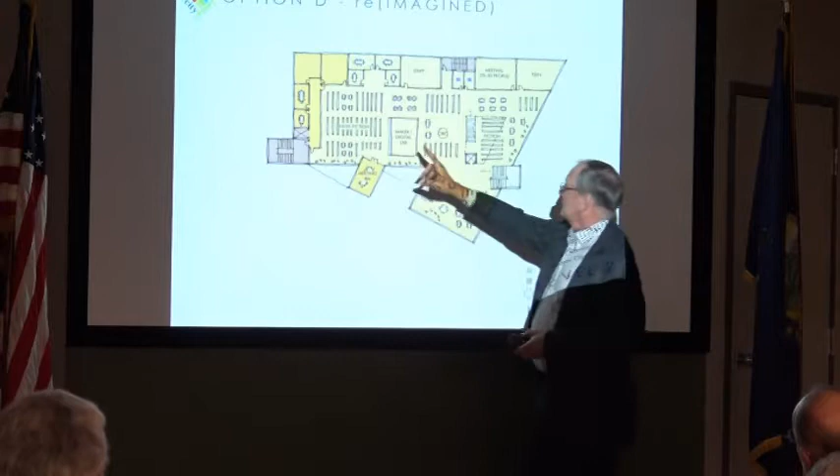Okay, any other questions? Second floor? All right, so we have again the elevator from City Hall lobby here, the stair here. We've got this elevator here, we've got this stair going up. This stair only goes two stories. And we've got the stair in the back.

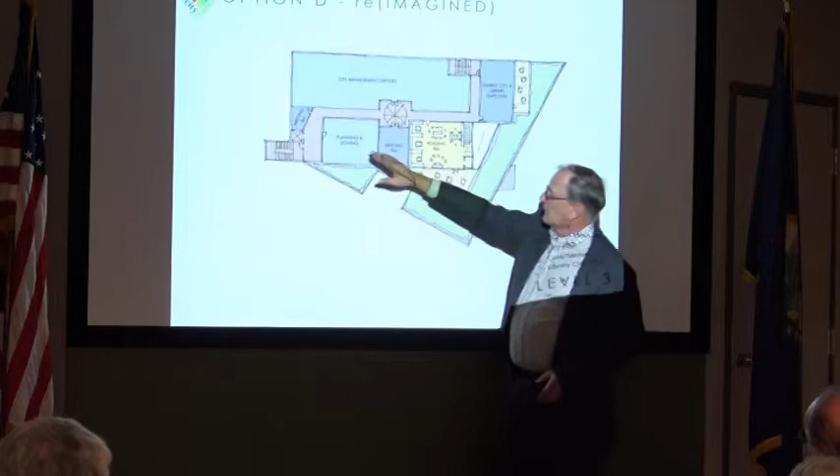And we just put in another meeting room here, maybe this is where the boards and commissions meet. It has a very special place looking out over the city. And we have a smaller meeting room here. So again, these two meeting rooms could be shared by others.

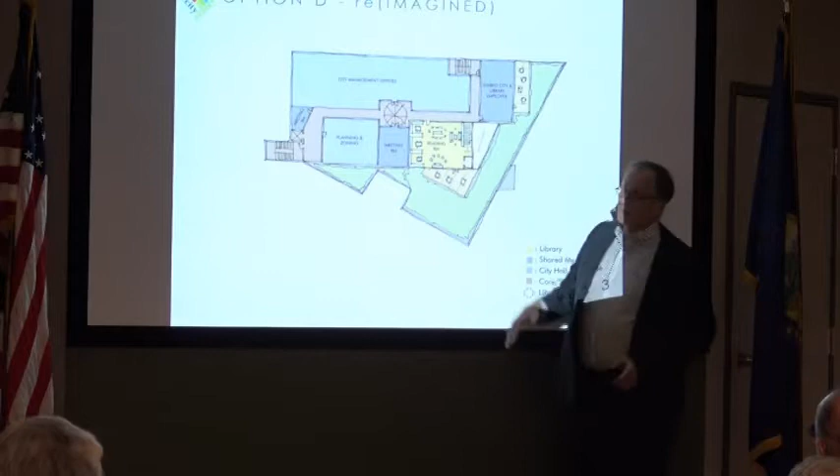And then we also have the shared city and library employee space - this is where the wellness center is, where the break room is, all of those things. We've located it so the library staff could use this stair to come to it from the first floor. We have an outdoor space for them as well, and we're showing lots of green roof happening around here.

So that's the City Hall space - we haven't gotten into defining exactly all the office space and conference rooms built into these spaces, but that's our next step. So are there any questions about this floor? I'll start in the back there. Is there a provision for library staff on the 3rd floor, and is that something we budget for - a 3rd floor staffing?

Right now we're looking at this as not being a staffed floor, and we're working with Jennifer doing some research and finding other libraries that have experienced this. However, we could also have a portable station up there, as we mentioned, doing downstairs. The only access from the library is right here, so we would be able to see if people are going up there and whether they need help. So we're still exploring that, but we did hear there was a great desire to have this 3rd floor reading space.

Other question? I'm just thinking about the security of that reading space. Will there be anybody able to look in and make sure everything is okay in there? This wall would probably be glass.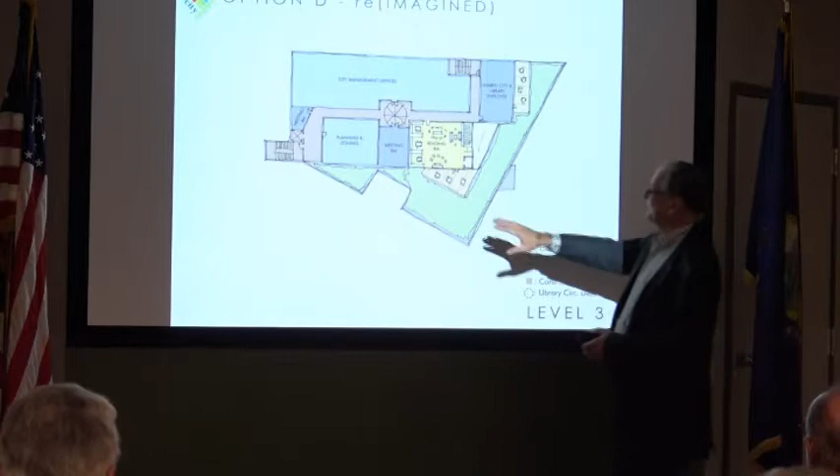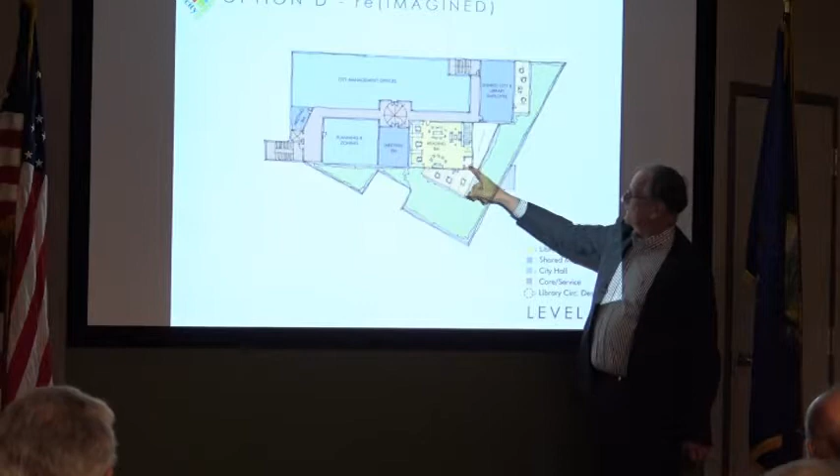When you talk about the reading space upstairs and the steps, is there also going to be an elevator? Yes, I didn't see where that- the elevators, I wondered if that's what that little box was. Yeah, it's supposed to have an exit. Okay, that's why I didn't check. We missed that one, but yeah, the elevator goes to that level.

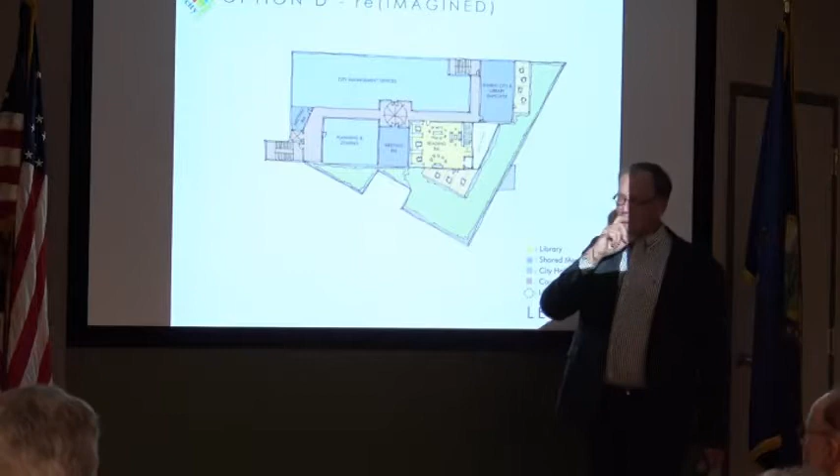The actual roof of this top level, is it a green roof and accessible, or is it solar panels? Well, this roof right here over this space- yeah, okay, so right now we've been showing this as being solar panels, and it would not necessarily be accessible for the public. I mean, it'd have to be accessible for servicing. Oh sure, yeah. But this roof would be reserved for the renewable energy source up here, and then this is the green roof. Excellent. Is it pitched or flat?

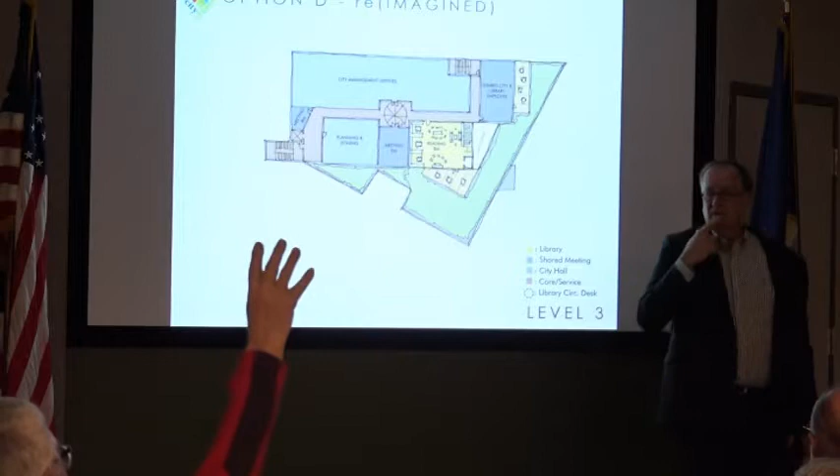We don't make flat roofs, but it's slightly pitched. And will the pitch face south? Yes. Well, when I say it's not flat, it's- what do we generally call it? A low slope roof. Low slope, there you go. So it's like half an inch per foot, so water will drain off it. I'm more concerned with the sun, when these are facing south. Okay, you just place the panels- solar panels will be mounted such that they're capturing the sun.

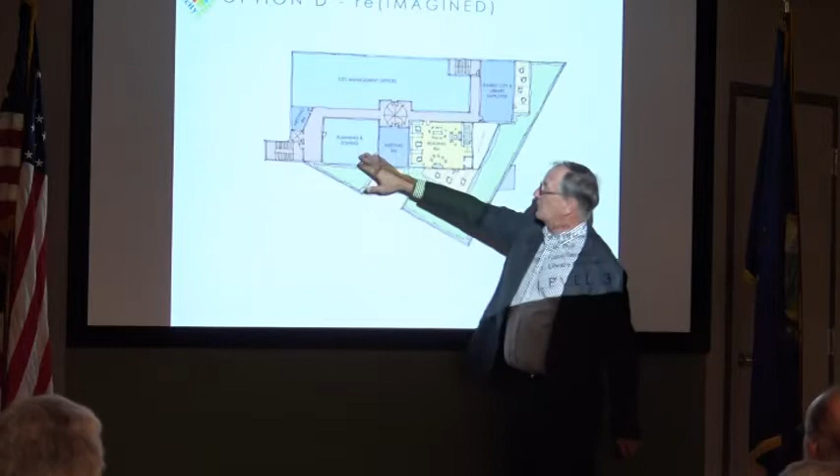How does the number of meeting rooms in this plan compare to what's in existence today? A lot bigger, significantly greater. I don't have the exact count, but in terms of capacity, this is the primary meeting room. There's a meeting room upstairs, and a smaller one upstairs too. So there's 3 rooms in this building, pretty much, and there's 1 in the library today. So we have the auditorium and the multi-purpose room, and then I think there were 4 or 5 on the second floor, and there's 2 here, and there's still going to be some conferencing areas within these spaces. So we have significantly increased it.

We can provide that number. It's just, I was in a building where there were a lot of meeting rooms and they didn't get enough use, and that was wasted space, frankly. So I don't know if that's something to consider, really actual use of meeting rooms and concurrent use when establishing a role.

I know from our experience working in libraries that meeting rooms in a public library are high on demand. One library we work with, in a smaller community just a little bit smaller than this one, all of the meeting rooms are reserved online, 3 days in advance, booked every day. They hold a couple that are a lucky-day kind of deal where you can walk in and if it's open, it's yours. They limit use to 2 hours, or everybody has a different policy, but they're constantly being used, whether it's HOAs coming to the library, a club, someone starting a business meeting with a client, or sometimes it's for-profit driven, which those libraries charge for. Typically they don't charge for nonprofit, but every community has a different policy. But those meeting rooms are packed. Because they're so flexible, have daylight, and good acoustical separation, which is another requirement, so you're not sitting in a meeting room hearing the conversation next door, they're very, very popular. And I would suspect, from what we've heard, that it would be the same here.

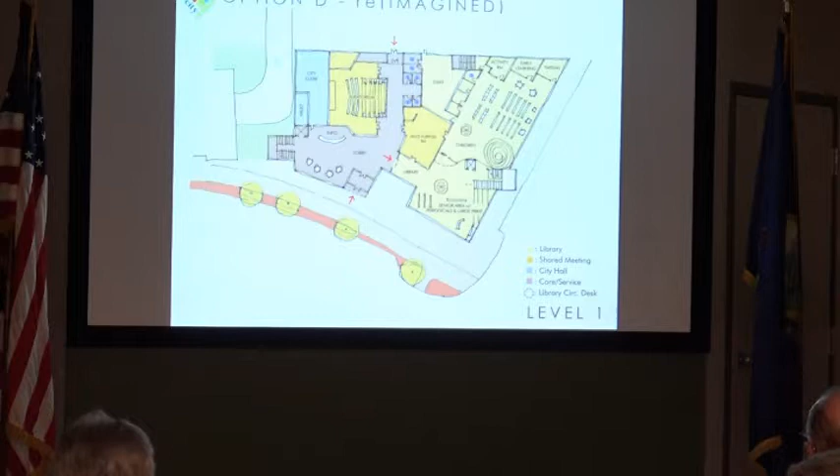Well, certainly, but a good example is I don't work out of this building, however, I'm here a bunch. And it's really not, and I'm further away than this building would be to Market Street. So it's not that much of a drain on staff to come and go. And Rec's a little more insular in their operations - they're doing so much programming stuff, constantly. So this space will still be used as multi-purpose?

In the short term, it's undefined, and it's reasonable to assume it might continue in the current fashion. And then you guys will take over that space, I assume - city offices? If I may, all that is detail that we're not... well, it's preserved. There's no other program use to backfill once planning and zoning and city managers leave the space. There's no plan, immediate plan to have someone else come in.

Okay, so we had a question up here. Yeah, well, I'll make my pitch again that I made Saturday. I'm Jennifer Cookman, and I'm Chair of Recreation and Parks Committee, and I've heard again a question about senior center and other kinds of spaces that can be used. We have no program space at all, and no real indoor activity space. It's either - I've heard that the seniors pack this room on the senior lunches on Wednesdays. And one lady told me that when she wanted to come to work out for Tai Chi, she would ask, is it going to be in this room or is it going to be in the tiny little room attached to the offices? Because in there it's a sweat box, and here it's cold.

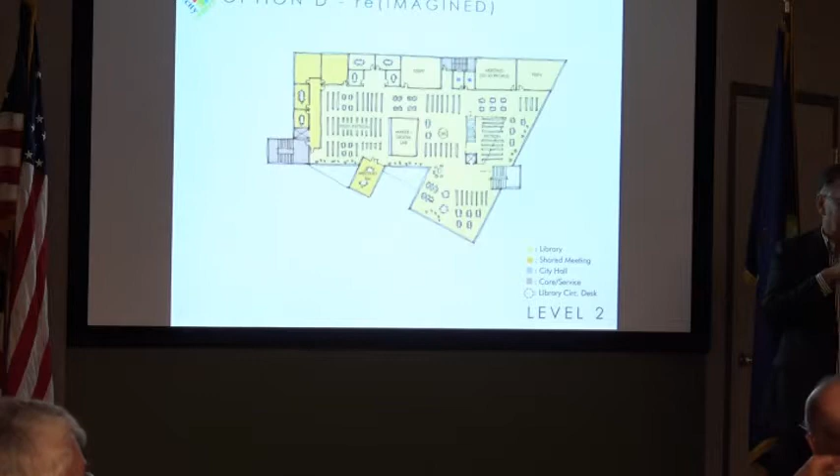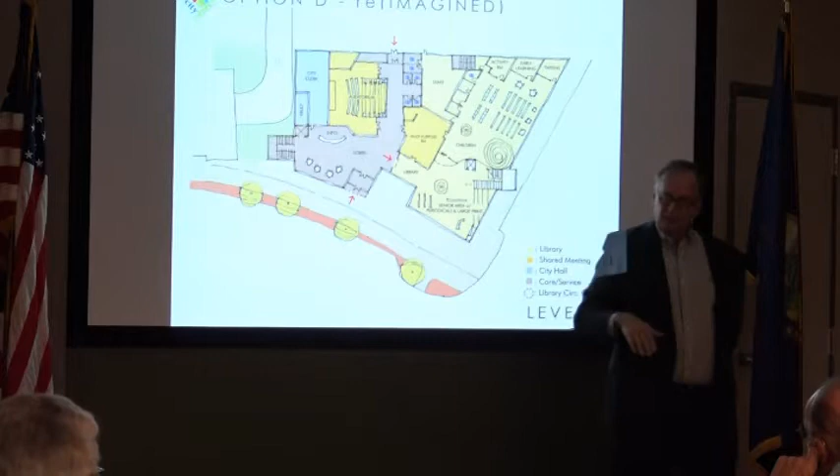This is more about the visioning piece of it. In option D, are you hoping to create that sort of double-story, atrium-ish effect, or is that not quite there? We have, it's not necessarily two stories in height, but we have like a story and a half in height in this area here, so that it has a much stronger expression to the street.

You can see a bit more glass there, and so that's where that would happen. Also, the entire first floor is going to have a very high ceiling height, because of the auditorium, multi-purpose room. So that entire floor plate is up, and we can do a lot of things with that space, so it'll be more impressive than walking into a ceiling of this height.

Just to discuss the green roof idea, what exactly will that look like, and is it usable? Can you walk on it, or what? No, typically you cannot walk on it. It's a special kind of planting, and there are different ways of doing it, but it still has to drain, and we have to get water back to the roof, to the drains.

I'm not sure what you do in Vermont, but we've done them. We have very drought tolerant plants that we use in Colorado, but there are different kinds. Most often around here they're generally trays. They're a way of helping with stormwater, a way of keeping the temperature around the building lower, and they're nice to look at if you're looking out over a roof, a little bit nicer, but it's not meant to walk on or anything like that.

Do you have to mow them? No, there's minimal maintenance in them, like the hospital, a different kind of system, but similar approach. Are you thinking of decorative grasses which die off in winter and come back to life in summer? Yeah, the plants will have to be selected for this particular environment. We've done a lot of decorative grasses that you're describing, but again, we're not quite to that level, but those are where we'll start exploring.

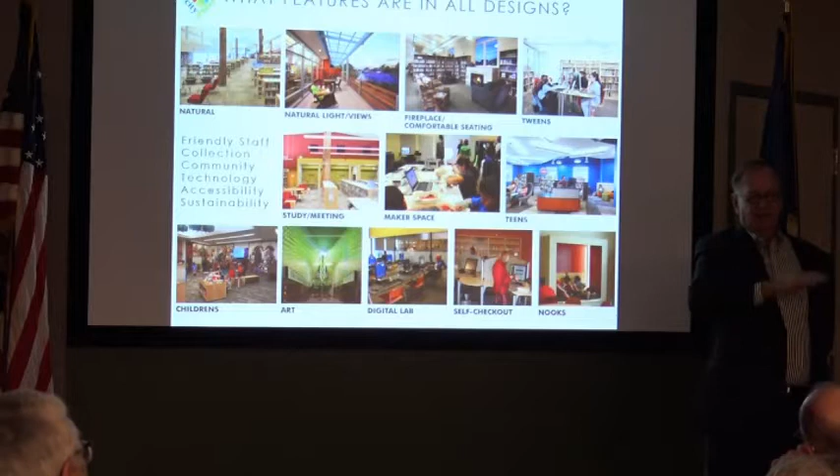So beyond just the shades, but most likely in many of those areas we would have shades. And we'll calculate it so that we're looking at where the sun is throughout the year and how the angle changes, and when we want the sun and when we don't want it as much.

So we talked about these on Saturday and last Thursday, but these are the types of spaces - the maker space, again focusing on technology, a teen space where there's a variety of things happening, kids playing games, kids collaborating together, a digital lab. We're going to have a form of public art in the building, and that welcoming senior fireplace area coming in.

So we'll have lots of those spaces. And then just to finish up here - is it not working? There we go. So we talked about sustainability, here's that green roof.

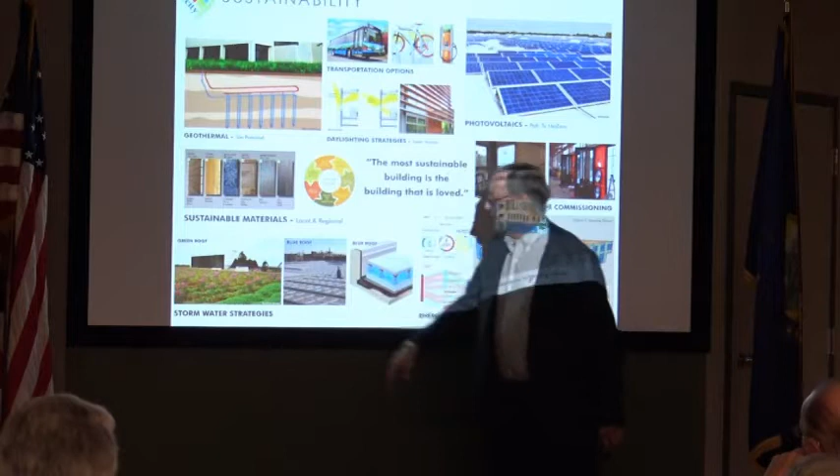And even looking at how we're exploring some geothermal, we're looking at photovoltaics. Doing commissioning, I think, is a given - that's what we want to do. And this kind of circles around to the idea that we think the most sustainable building is the one that you all are going to love. It will incorporate a lot of these features, but it's the one that you will all come and use.

What does building and envelope commissioning mean? Building commissioning is basically going through a detailed process where there's verification that the systems are working properly as they were designed and intended. It's a more thorough analysis, starting from the very beginning of what that room is intended to do and making sure at the very end that it's actually doing that.

We're not building this building in a factory, so we don't have all the controlled environments. We come back and test it, and make sure it's doing what it was intended to. A lot of times we'll find that things aren't performing quite the way they were supposed to, and the cost of that is often offset by the savings we find through the process. It's just the nature of how things come together.

Have you considered PV tiles instead of panels and roof tiles? We haven't gotten there yet. I'm sure we'll look at alternatives.

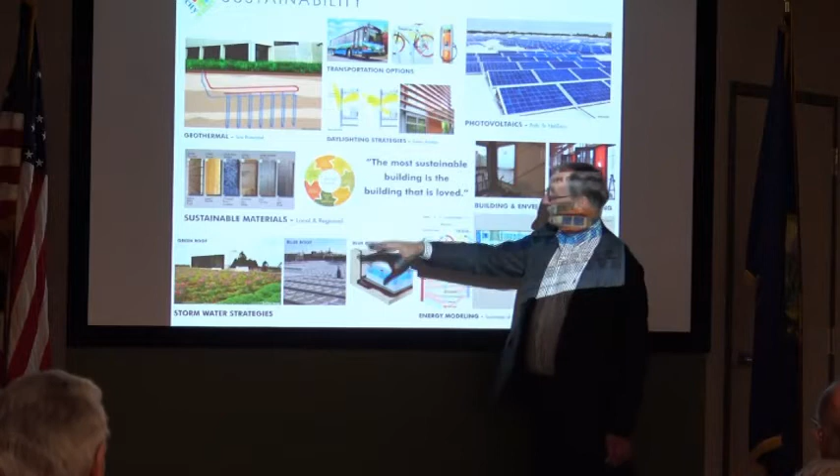But that list isn't necessarily ones that will be used in this project - we're not there yet. What we're trying to do here is reinforce the idea that we want this to be a very sustainable building. We're always talking about it, but we haven't dialed in exactly what roof system, what mechanical system - we're exploring the alternatives, looking at our budget and putting it all together.

I was wondering if anyone could put together a list of places we could go that have already implemented a lot of these things. Like you mentioned public radio and the seating, but are there places we could look at the kind of glass somebody's already using, or things in the Davis Center that might be similar?

Sure, or roofs, blue roofs. It would be great to be able to go around and see the kinds of things we're talking about. I think VPR is a great facility to go see if you've never been there - it's a terrific design. But we can help the city put some things on the website, and if we say we decided to use a blue roof, we can say go within a reasonable distance and see this, or click online to check it out.

We're not quite there yet ourselves. We're still trying to figure out the right combination of all the above, but we want to underscore our commitment, and the city's and library's commitment, because it's very important in a library, especially since we're bringing up generations through the library. If we can reinforce these ideas, it'll be great.

I just want to make a few comments. I think we're very lucky that we don't have a building right now, and we don't have to retrofit an old building for modern library needs with digital and all of that. We can start from where we are now and make it for the future. I think we're very lucky that way.

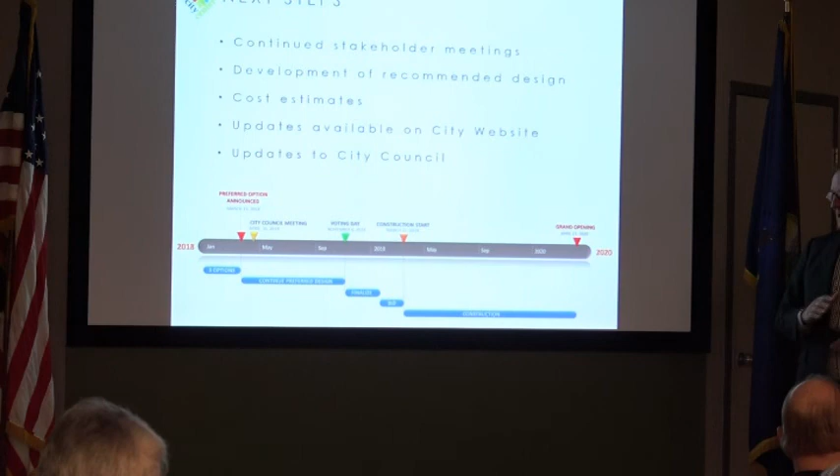I think that's the end of it—there's the beauty of it all. Congratulations. Thank you.